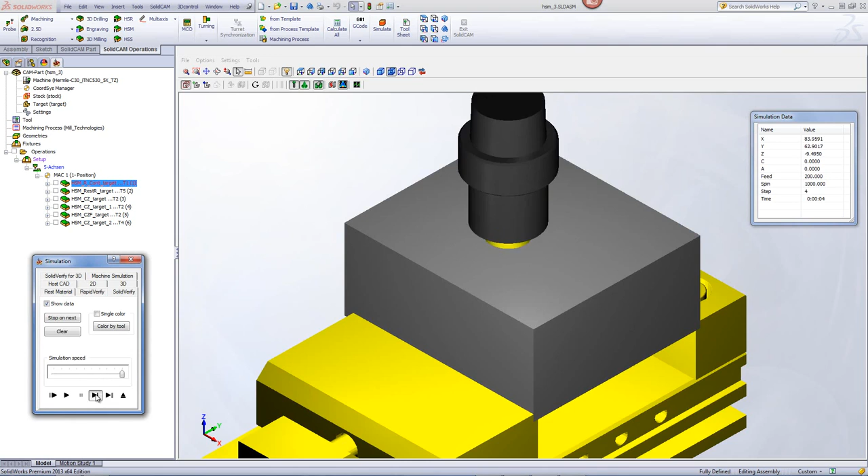If we take a look at the simulation itself, you'll see as the tool goes in, it works around the part. And when it goes down to its next step, you'll note that we have a wide step over here because of the tool clearance.

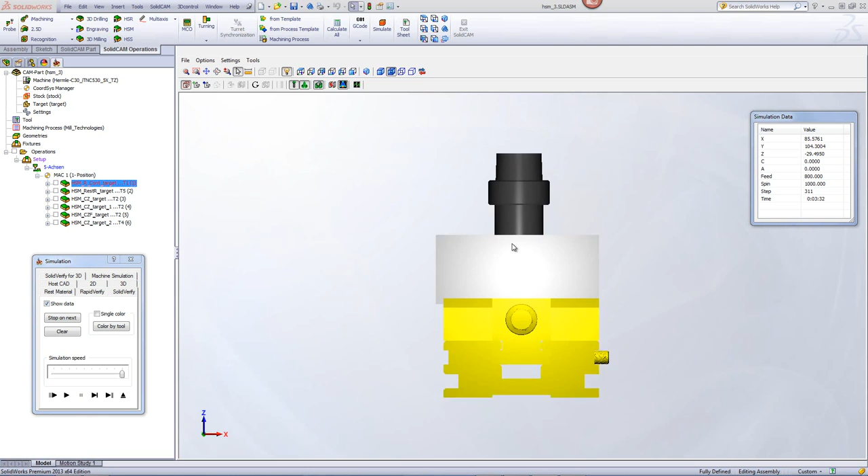If we go a little further and we take a look at the side view of the part, you'll see that our holder is actually inside the part itself, and it's just moving over because of the tool holder clearance, going down to the very end of the part, leaving large steps for our rest rough operation.

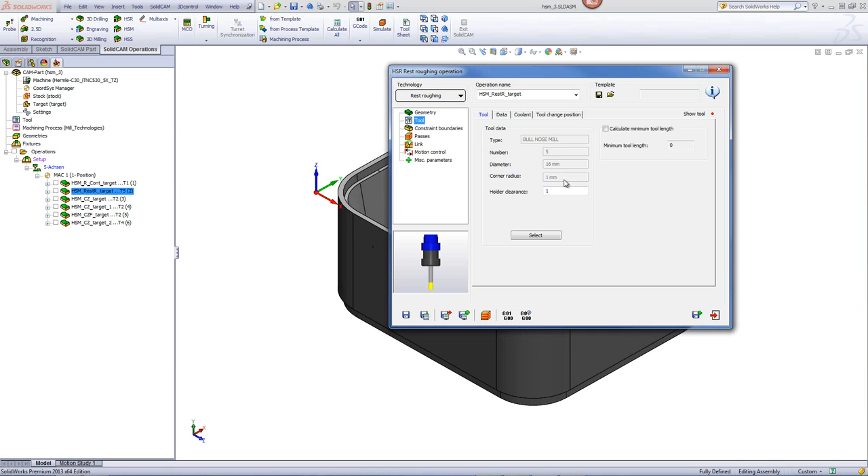In our next operation, we'll begin doing a roughing operation, but we'll be using the option of rest roughing, this time using a smaller end mill of 16 millimeters with a 1 millimeter radius at the edge. And the tool will be outside of the holder by 30 millimeters, allowing it to go even further down into the part itself.

If we take a look at our passes area, you'll see that we will again be leaving a 0.5 millimeter offset on the part itself, and this time going down every 5 millimeters.

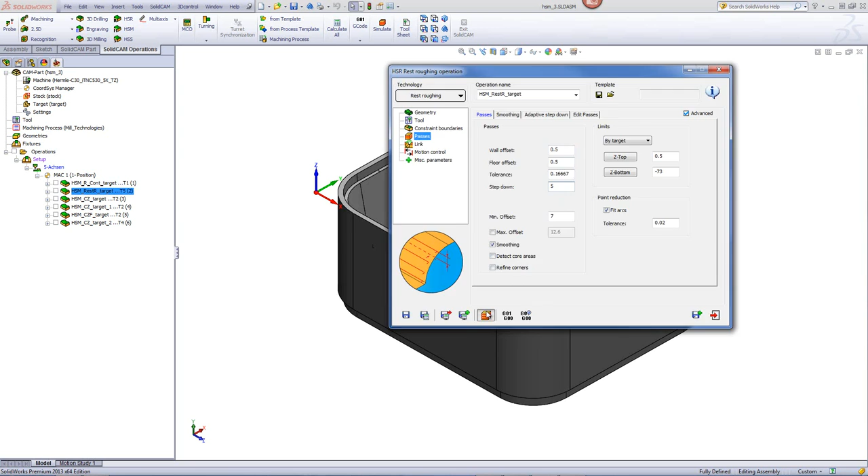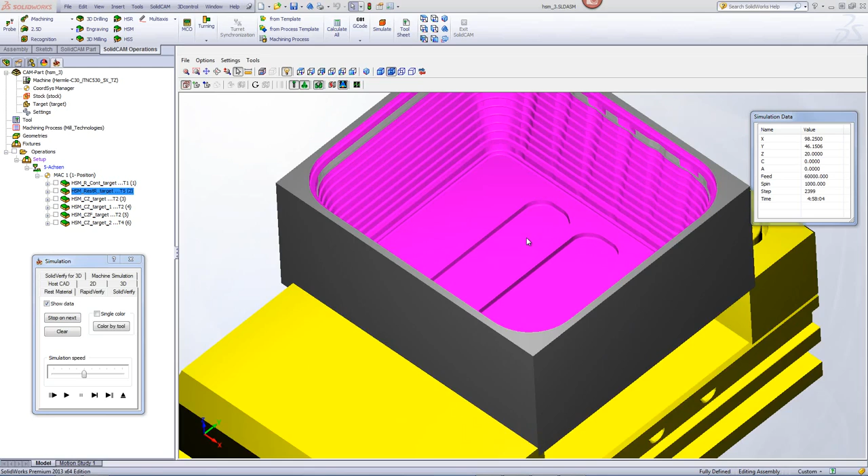If we take a look at the simulation, you'll see that the tool is working only on those steps, clearing off those steps as it's going further down into the part itself, and only working in those areas until it gets to the very bottom of the part, and also cleaning out those pockets which the larger end mill cannot work in before.

From this point on, we'll be doing our finishing operations, and we've broken this down into several different areas. Our first area that we're working on is the top flat surface over here. And if we go into the operation itself, you'll see that we'll be using the option of constant Z machining.

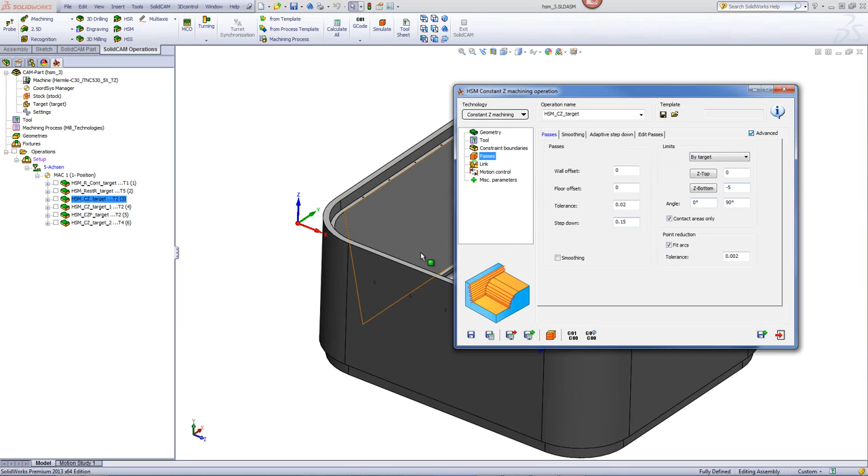The tool will be a 12 millimeter bullnose end mill with a 0.5 millimeter radius. And if I go down to the passes, you'll see that we'll be going down every 0.15 millimeters, and we'll only be going down 5 millimeters into the part up until this step as shown over here.

If I were to take a look at the simulation, you'll see that the tool will be working around this area over here up until that particular surface only, not going any further down on that material.

Now, in our next operation, we'll be using the exact same tool as we did before, the 12 millimeter bullnose tool with a 0.5 millimeter radius. But if we go into our passes area, you'll see that we'll be working between the depths of -62 and -72. In other words, we'll be working from this surface up until this surface over there, only working in that area, again stepping down every 0.15 millimeters.

Taking again a quick look at the simulation, you'll see that the tool works exactly in those areas only.

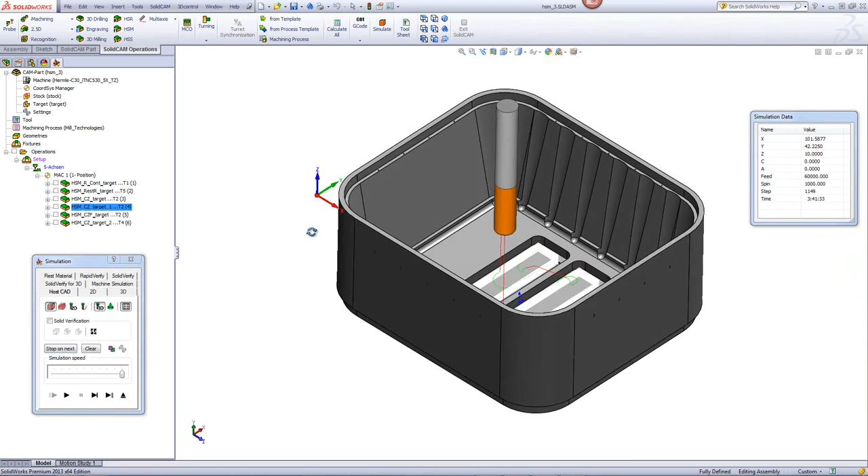In our next operation, we'll be doing a horizontal finish on the part, working only on the flat floors of the part itself.

If we take a look at the tool, we'll be using again a 12mm bullnose tool with a 0.5 millimeter radius. And if we go into our passes, you'll see we'll again be working on the lower areas on the bottom over here, on this surface and on this surface over here.

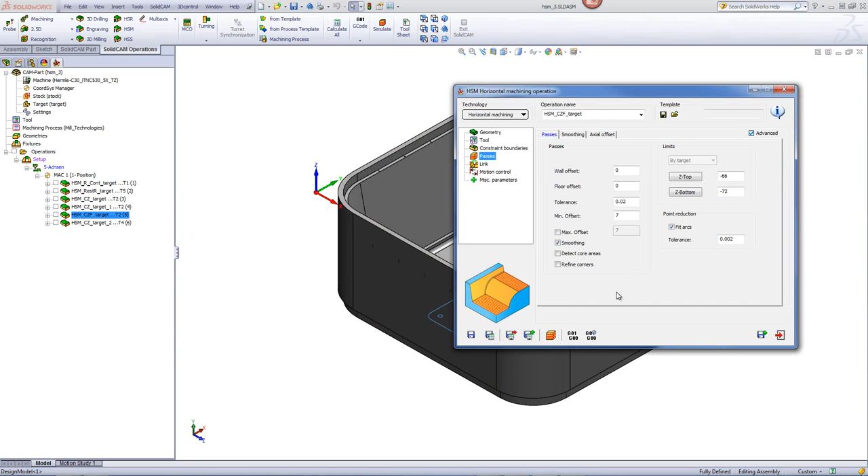If we take a look at our simulation, you'll see that the tool will only work on this area and in this area alone. No other areas were machined.

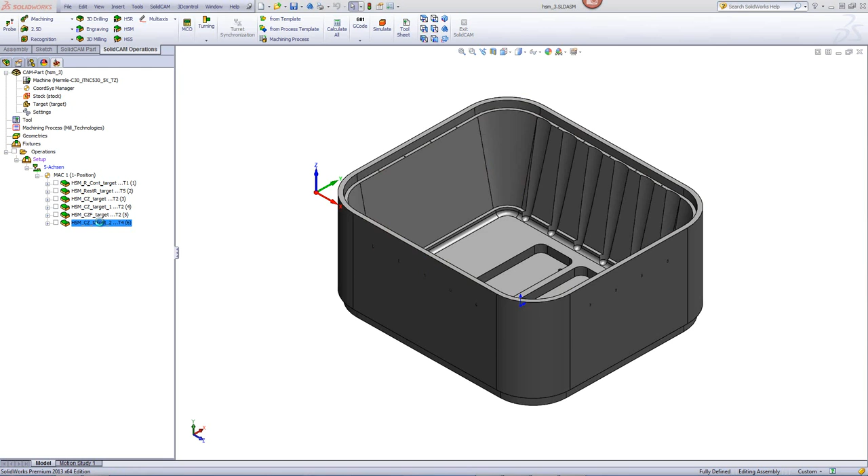Now, in our final operation, we'll be working on these tapered walls around the part. For that, we've used the option of constant Z machining, and since HSM recognizes also tapered tools, we'll be using a 12-degree tapered end mill to machine out those walls itself.

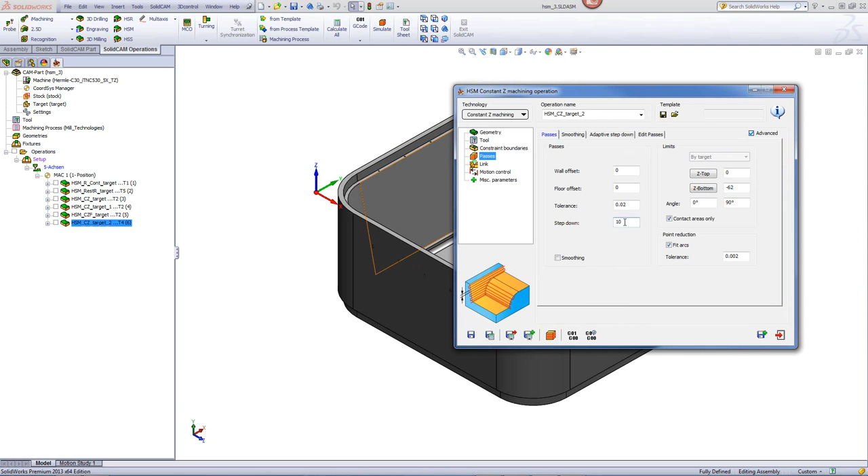And since we are using a tapered end mill, in our passes, we can take large step downs of 10 millimeters on the part itself. If we take a look at the simulation, you'll see that the tool will work exactly on those tapered areas, stepping down every 10 millimeters as shown over here.